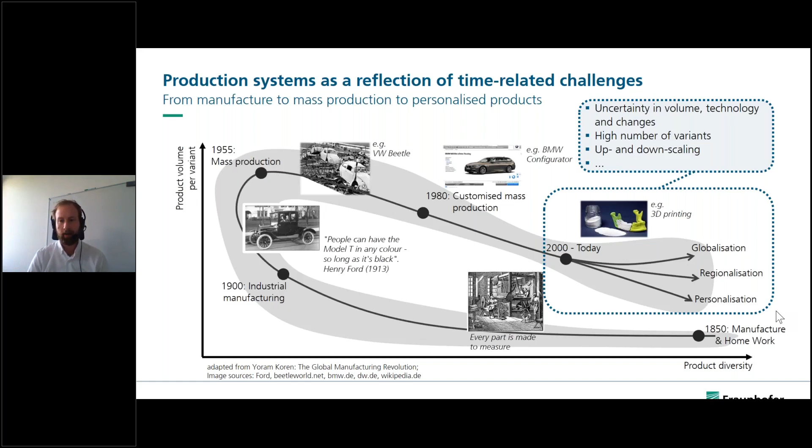So today, your production system has to adjust to these challenges over a product life cycle, and maybe it's not anymore that you ramp up a production system for the start of a product, but much more that you ramp up a production system in your factory and try to include further products over a production life cycle. So if you think about taking these challenges into your production system, we're talking, in our perspective and at our Institute, about matrix production systems.

Matrix production systems are mostly flexibly linked process modules. What are process modules? I will talk about it in the next slides. But the concept of a matrix production system is trying to adapt to new conditions from the outside and trying to mirror them and match them to your factory system.

A matrix production system tries to adapt to differences in quantities, variants, technologies, and processes over a production system's life cycle. It tries to be the answer, to be more flexible in your system, to be productive even with a high number of variants, and to enable upscaling and downscaling in really incremental time steps.

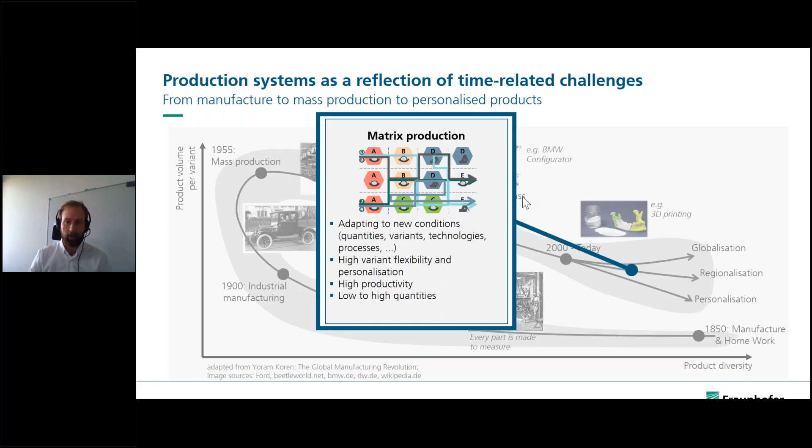Talking about matrix production systems, in our perspective, a matrix production system consists of flexibly linked process modules. A process module can be quite different in its configuration. For example, a process module can just be, like at the top left side, a single workstation, where manual processes with differences in cycle times can be operated.

If you think about differences in cycle times in the context of line production, it's not easy to be efficient implementing all the different cycle times in your production line, because if there's a difference in cycle times, the left worker has to wait on the right worker, and waiting time is wasting time. It's not really lean. So the challenge is to be more flexible, and you can get it by making the station a little bit more independent of the other stations.

If there are still tasks and processes which are mainly repetitive with no real differences in cycle time, it's still interesting to make a process module like you see in the middle top, which is still like a line production, but you don't put every process in a line, just the processes which are near together and have no difference in cycle time. So it's a subsystem, a line production within your matrix production.

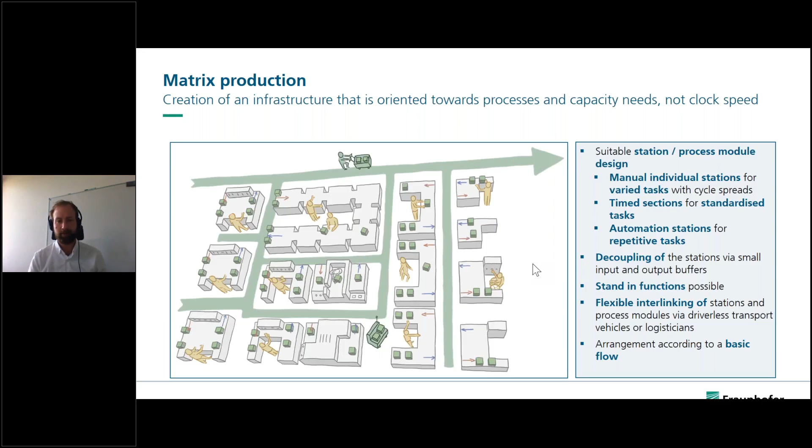As mentioned, there are no fixed process chains for your orders anymore in a production system. It is an order-specific decision making in your production system, and it's not that you make the decision far before the production start of your order. It's just during the production that the order is deciding which station or process module will be the next one.

This depends on which processes and operations are required by the order, but also, in a second perspective, on where the lowest waiting queue might be for your product over all stations which offer the needed processes and tasks. Think about it not like a fixed production system, but like an infrastructure which is offering different processes and technologies to your orders.

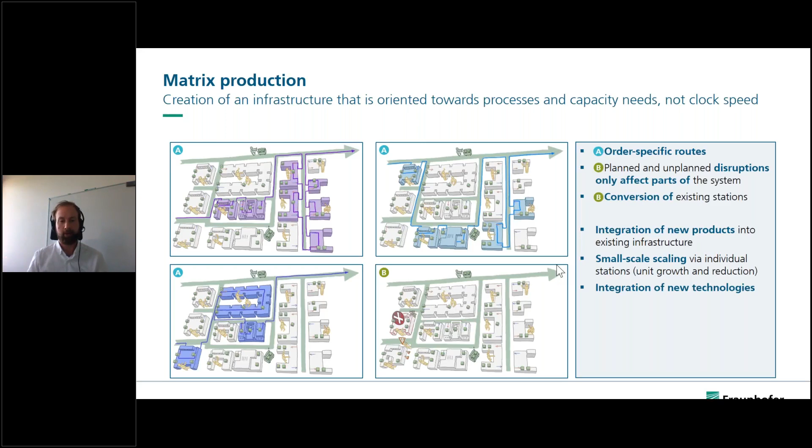So putting this to an example, talking about car manufacturing. Today we see that there's a rise in electrical vehicles, but you don't know how far this will go on, or how the political system will decide, for example, if there might be no diesel vehicles allowed anymore after 2035, or if there might be more hybrid customer demand. Some customers still go to diesel vehicles, but how many people will go to the electrical vehicle? This is not easy to say for the future.

So you have to design your production system much more flexible, and there might be points over a production life cycle where you have to do some changes. And in this case, we talk about flexibility corridors and the change between flexibility corridors over time.

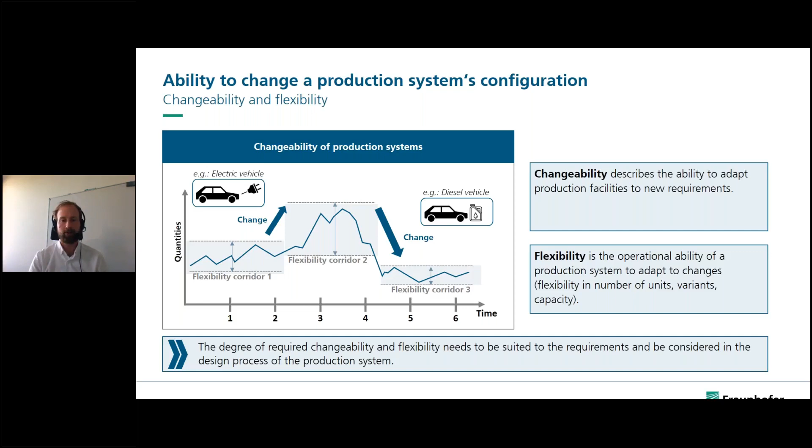So not thinking about just one product life cycle and making a production system for only one product and its variants, it might be interesting to think about what products you want to manufacture in your company, in your factory. Isn't it more interesting to think about an infrastructure a product might use, and change your infrastructure according to new products and decreasing products? It's more like a life cycle of a production system which is continually adapting through changes in the product demand of the customer.

So going to this picture, it's not like you're ramping up a production system for your new electrical vehicles and ramping down the production system of your diesel vehicles. It's interesting to think about: are there not a lot of processes common between both cars? Of course, there are differences between the electrical motor and the diesel engine.

These are completely different parts, and there might be completely different stations to build in these parts, but still a car is a car. So the interior and exterior processes, for example to put a seat or a wheel into your car, might still be the same. Of course, in detail, the parts, the seats may be different, but the processes to put in these parts might still be the same, and the knowledge the worker needs is still the same as in past years.

So think about the system: today you have many more stations putting in the diesel engine, you have some stations to build in the interior and the exterior, and there are a few stations to put in the electrical motor. It might be interesting to think of the production system as an infrastructure which is just changing over time, not totally ramping down and not totally ramping up.

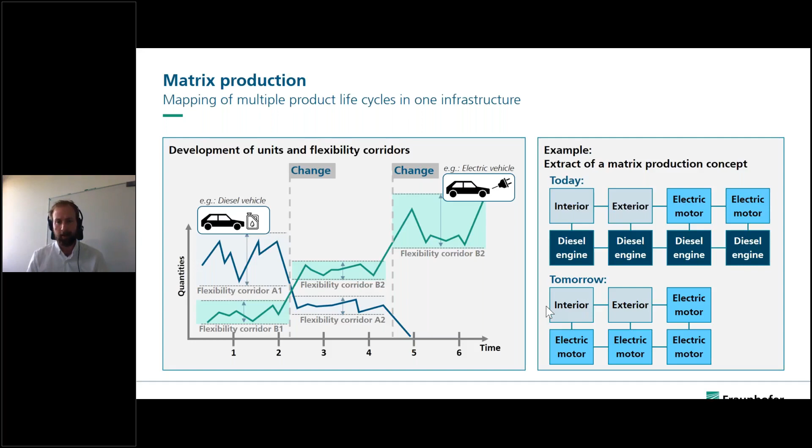But as you can see, you have made some changes in your system, but there are still some aspects in your system quite the same, like this example, the interior and the exterior stations and processes. So, a short summary of the matrix production system. We're mainly talking about flexibly linked process modules. A process module can still be a subsystem displayed as a line system if there are only small differences in the cycle time, if they're easy to put in one fixed chain.

But if you're talking about variants and processes which have really high differences in the cycle time, or differences in the demand, it's interesting to think of decoupling these stations and being a little bit more flexible. Of course, there's an increase in work in process material; it's not like you only get the benefits and there are no disadvantages. There might be an increase in the work in process, but if you can increase your flexibility and be much more productive, maybe you take a little more material waste in your material demand and work in process, but you gain a lot in the productivity of your workers and your resources.

So the advantages of a matrix production system are that you can implement a high number of variants in your production system. It's much easier to scale up and down depending on the requirement and the customer demand. And thinking about the technologies and the automation of processes, you have a much more planned utilization. You use your resources much more effectively, and it's much easier to automate processes by combining the demand of different processes at one single automation station.

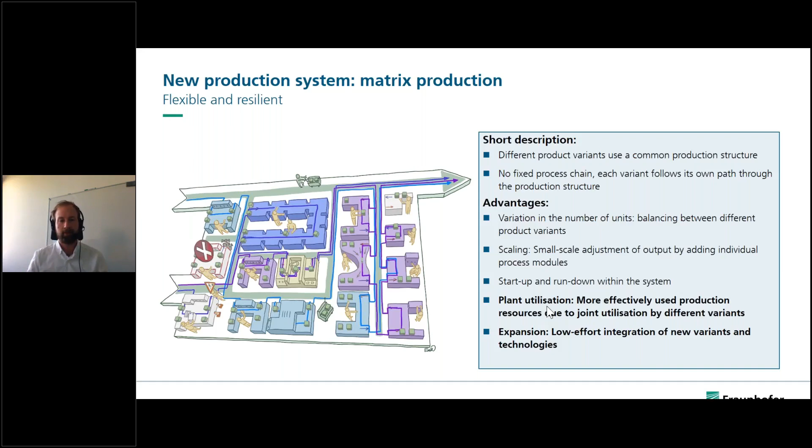So this is not only a theoretical model. We have projects trying to implement matrix production systems in different factories. One project we had together with Siemens in Karlsruhe. They built industrial PCs, and they were still producing a lot of products, but they had the feeling that they were not so productive anymore. So we did a project with them, looking into their manufacturing and assembly processes, and we looked where we have to decouple some stations and processes, and where it is still beneficial to use the lean line production system. So we designed some parts that still have the lean line, and some parts with decoupled stations and a high automation level, linking all of these stations by an AGV system.

So today they are even more productive and even more flexible. In this case, they mostly have only advantages in the system. They have slightly increased work in progress, but in total they are really happy with their new solution. And overall, there are more advantages than disadvantages to this kind of production system.